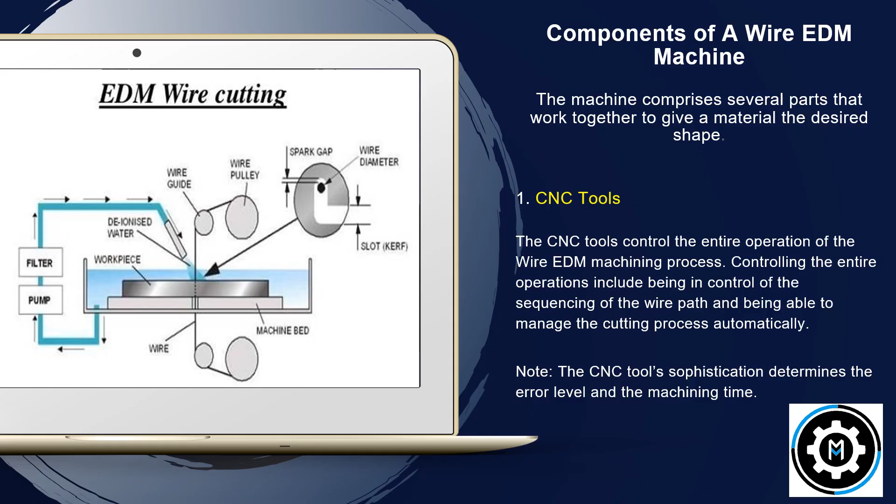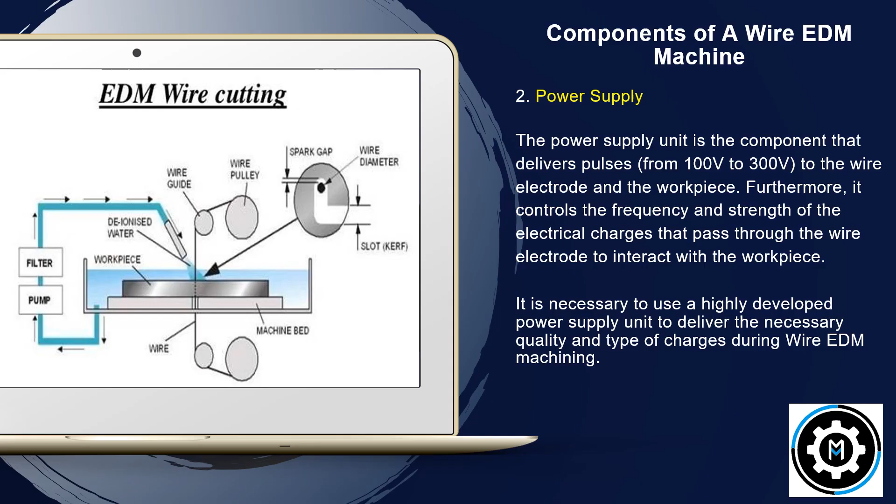2. Power supply. The power supply unit is the component that delivers pulses from 100 volts to 300 volts to the wire electrode and the workpiece. Furthermore, it controls the frequency and the strength of the electrical charges that pass through the wire electrode to interact with the workpiece. It is necessary to use a highly developed power supply unit to deliver the necessary quality and type of charges during wire EDM machining.

3. Wire. The wire serves as the electrode to create the electrical discharge. The shape and thickness of the workpiece directly influence the wire's diameter. Typically, one can use wires with diameters ranging from 0.05 to 0.25 millimeters.

The main types of wires used include brass wires. Brass is the most common EDM wire material because of its excellent conductive properties. It is an alloy of copper and zinc, and the higher the zinc content, the faster the wire cuts. However, there should be a balance because when the zinc content is over 40%, this decreases the corrosion rate of the brass wire.

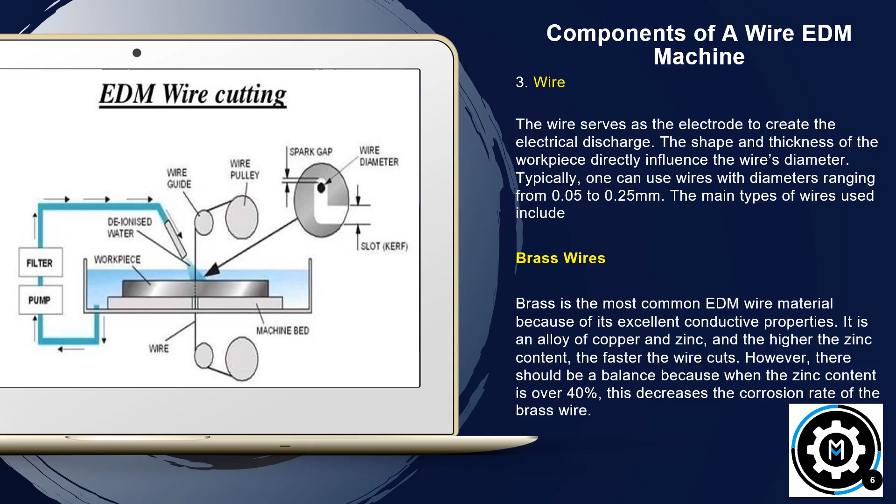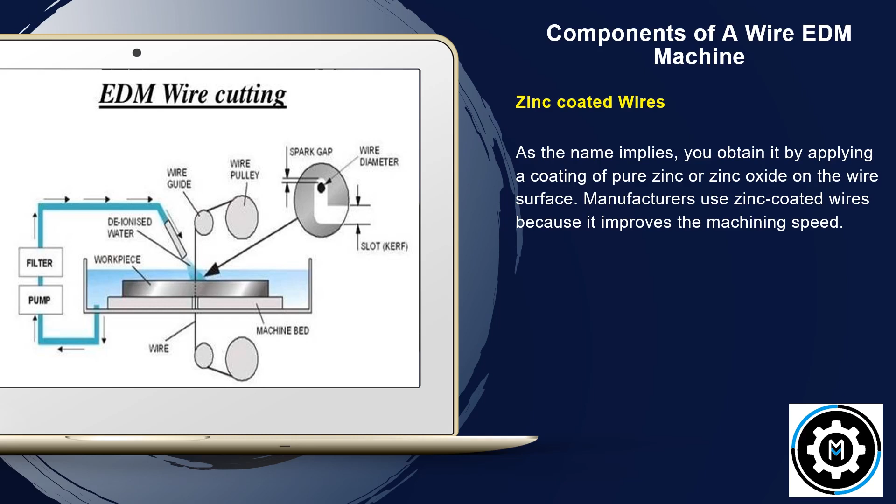Zinc-coated wires. As the name implies, you obtain it by applying a coating of pure zinc or zinc oxide on the wire surface. Manufacturers use zinc-coated wires because it improves the machining speed.

Diffusion annealed wires. The diffusion annealing process helps to create wires with higher zinc content, more than the 40% zinc. It involves coating wires with layers of pure zinc. These wires are ideal for mass production and can machine many materials.

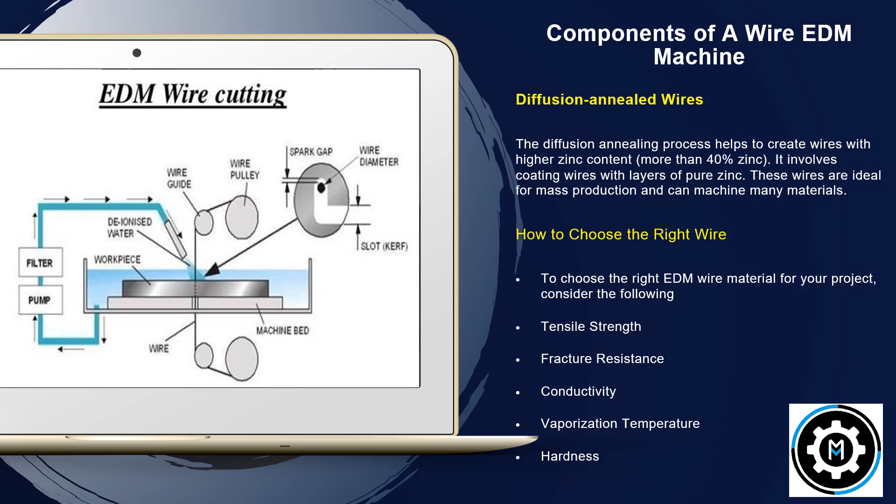How to choose the right wire. To choose the right EDM wire material for your project, consider the following: tensile strength, fracture resistance, conductivity, vaporization temperature, hardness.

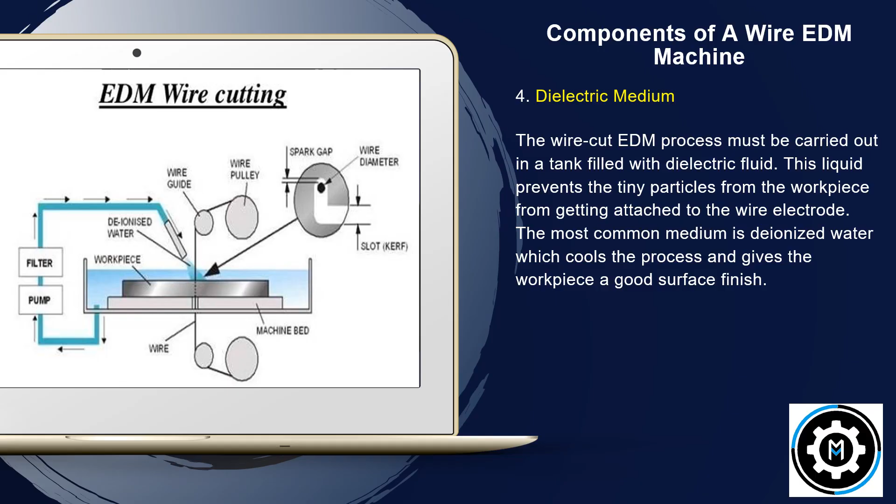4. Dielectric medium. The wire cut EDM process must be carried out in a tank filled with dielectric fluid. This liquid prevents the tiny particles from the workpiece from getting attached to the wire electrode. The most common medium is deionized water, which cools the process and gives the workpiece a good surface finish.

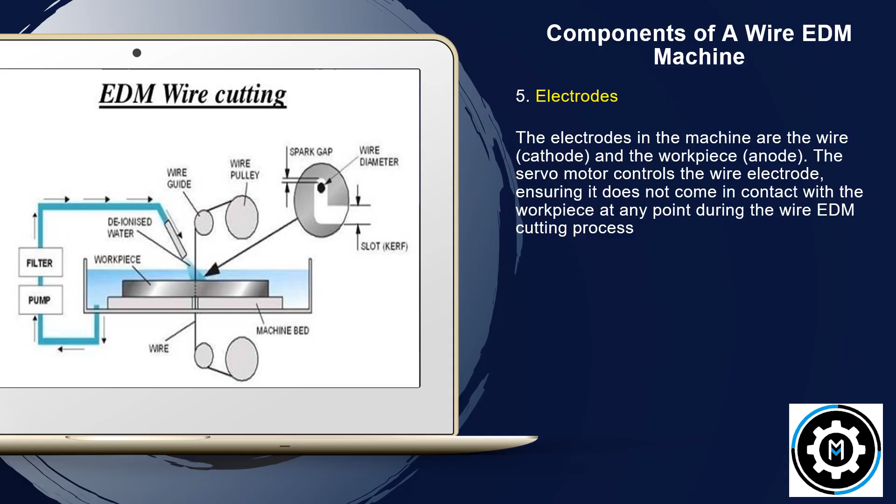5. Electrodes. The electrodes in the machine are the wire, cathode, and the workpiece, anode. The servo motor controls the wire electrode, ensuring it does not come in contact with the workpiece at any point during the wire EDM cutting process.

Materials a wire EDM machine can cut. Wire EDM machines can create complicated shapes and patterns on a workpiece. Additionally, they can machine most materials that can conduct electricity, even the tough and delicate.

Common shapes and materials you can cut with the machine include aluminum. Aluminum has excellent thermal and electrical conductivity properties. However, aluminum is naturally soft and can be challenging to cut with the process, as it may result in a gummy buildup after machining.

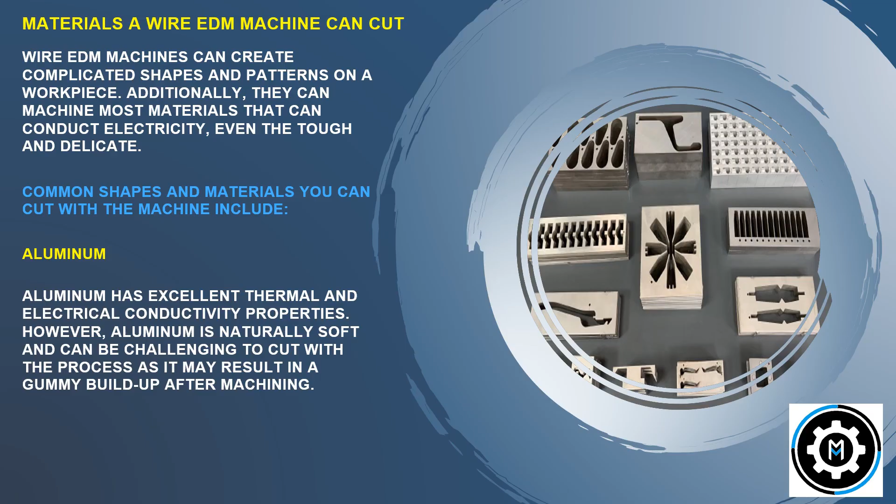Titanium wire EDM cutting is perfect for titanium, because the process can withstand the stickiness of this alloy and break up lengthy chips. However, you need deionized water as the dielectric medium to help control heat generation during machining.

Steel is a very strong metal. As a result, many manufacturers favor using a wire EDM machine over a CNC machine. However, the material generates a lot of heat, so one needs to take the necessary precautions.

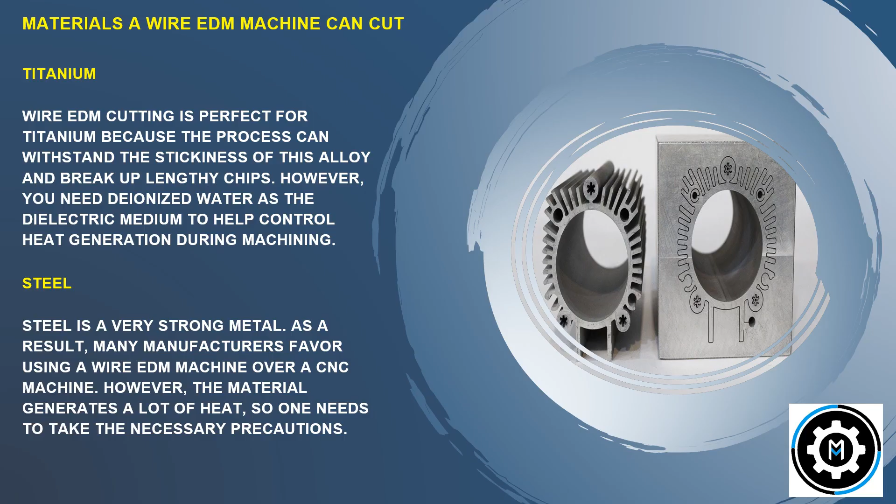Brass is easy to cut using the machine because it has high tensile strength. However, the cutting speed should be slow because it is a soft metal.

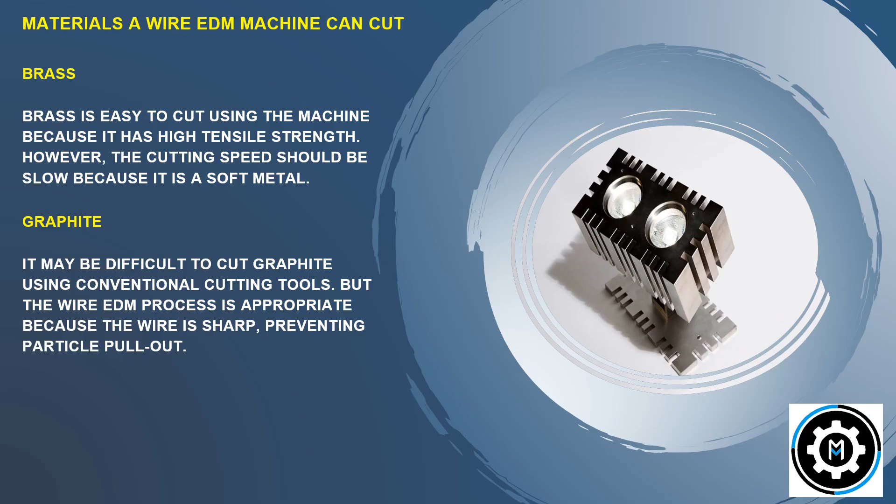Graphite may be difficult to cut using conventional cutting tools, but the wire EDM process is appropriate because the wire is sharp, preventing particle pullout.

Differences between EDM wire cutting and conventional EDM. The wire cut EDM process is an improvement on conventional EDM. Their mode of operation is similar, however, they have significant differences. Below are a few differences between both machining processes.

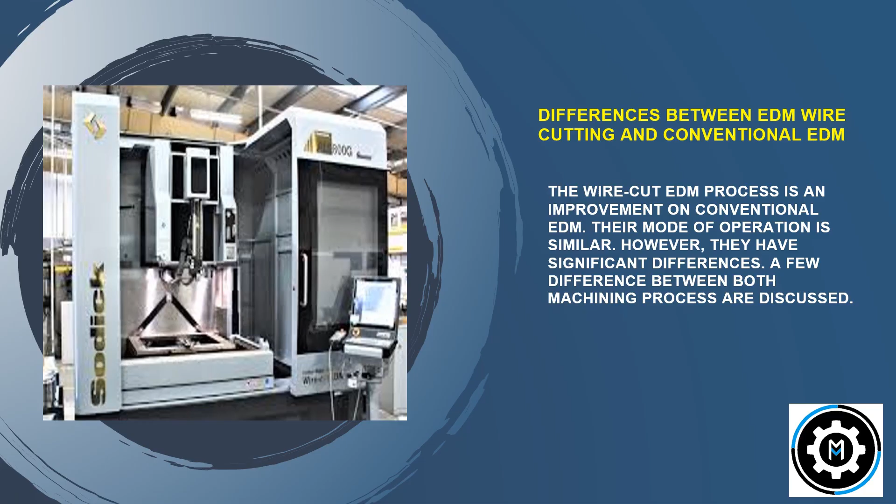As stated above, the electrode used in wire EDM cutting is a thin heated wire. In contrast, conventional EDM uses highly conductive metals like graphite or copper electrodes to produce electrical charges. The electrodes are in different shapes and sizes, which affects their smoothness. For example, a round electrode produces the smoothest surface, then a square, triangle, and diamond. When the electrode is inserted into the workpiece, it forms a mold, leaving a negative impression of its shape.

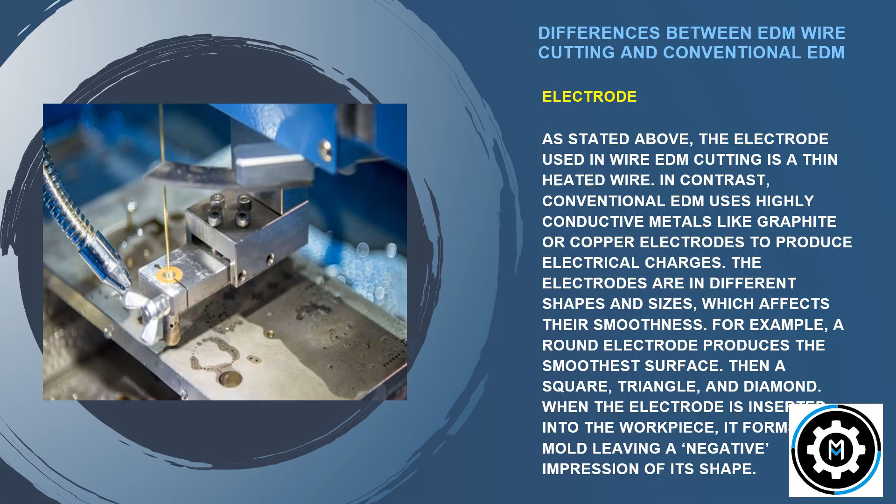Speed of machining: the electrodes of conventional EDM must come in different shapes. As a result, manufacturers must create and shape them before the machining process, and this takes time. In contrast, the wire EDM machine is ready to use as soon as the wire is in position, making it appropriate for applications that need to be completed quickly.

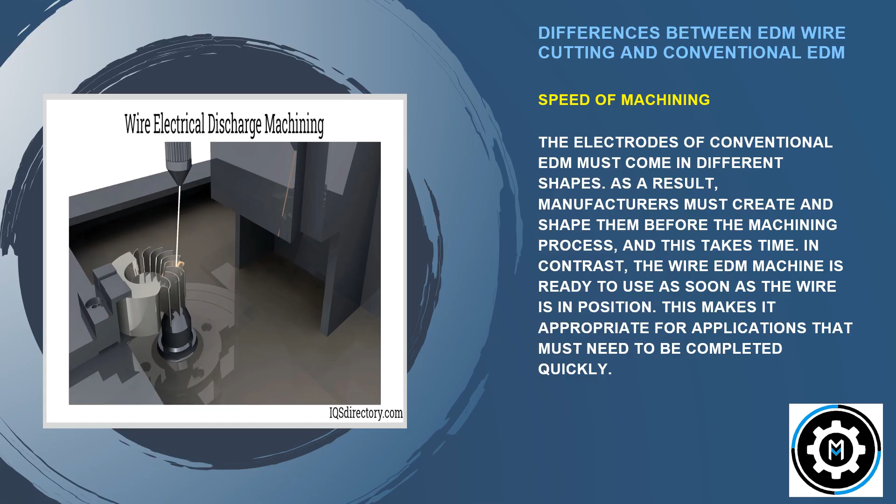Accuracy: wire EDM machining makes use of wire as the electrode. As a result, it has better accuracy than conventional EDM. For example, the wire electrode allows cutting at a thickness of about 0.004 inches. Due to their accuracy, they are better suited for machining parts with complex shapes and designs, unlike conventional EDM, which is more suitable for more rigid cuts.

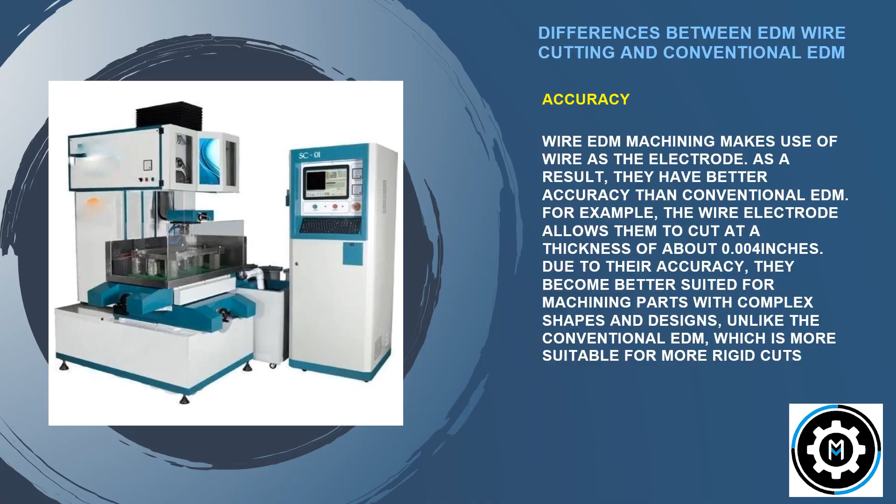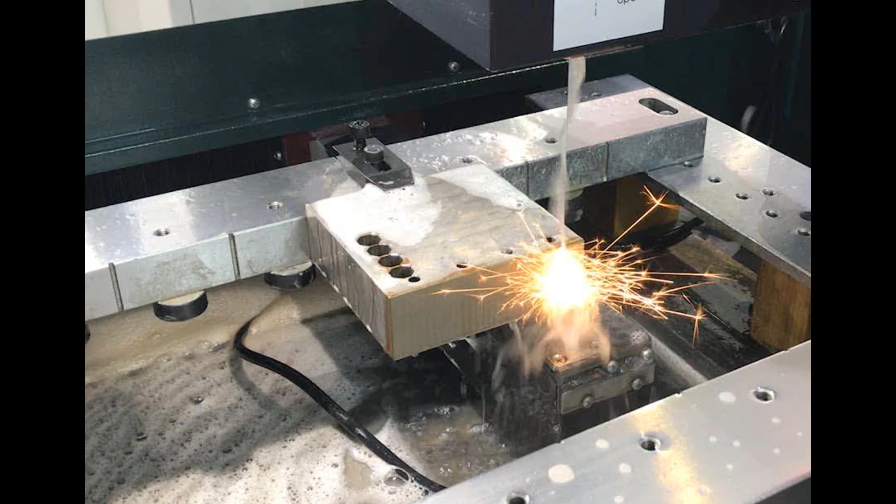Applications: wire EDM machining is versatile and can cut ferrous and non-ferrous metals, so many industries use it. Also, size and shape do not limit its use because it can machine both long parts and extremely small ones. However, conventional EDM can handle harder and thicker materials because the thickness of the wire electrode in a wire EDM machine affects its use.

Pros and cons of wire EDM machining. Pros of wire EDM: it makes precise and accurate cuts, eliminating the need for further processing and finishing of the workpiece. The process is suitable for creating complex designs and shapes that are otherwise challenging to produce using traditional CNC machining. It is applicable in machining small parts and cutting highly detailed items that would otherwise be too delicate for other machining options. Wire EDM machining is ideal for fragile materials that cannot withstand the stress of machining.

With just one stage of processing, the machine cuts materials leaving no burrs or distortion. The machining process cuts continuously without interruptions. Even if the wire breaks when cutting, the process continues immediately.

It is only compatible with materials that conduct electricity. An oxide layer may develop on the cut surface of some materials, such as aluminum. Therefore, this could necessitate additional finishing, which raises the cost. It has a high initial investment and maintenance cost.

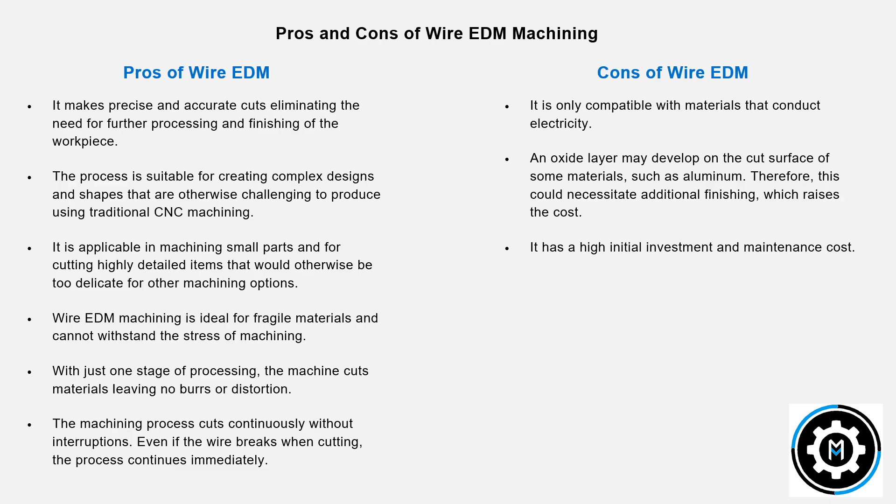Applications of wire electrical discharge machining. Automotive industry: parts in the automotive industry come in complex shapes and sizes and are mostly hard. As a result, the industry favors using wire EDM machines because the process does not rely on mechanical forces and the wire electrode does not need to be stronger than the workpiece. The process applies to making holes and cavities to customize automotive car parts like bumpers, dashboards, car doors, and many more.

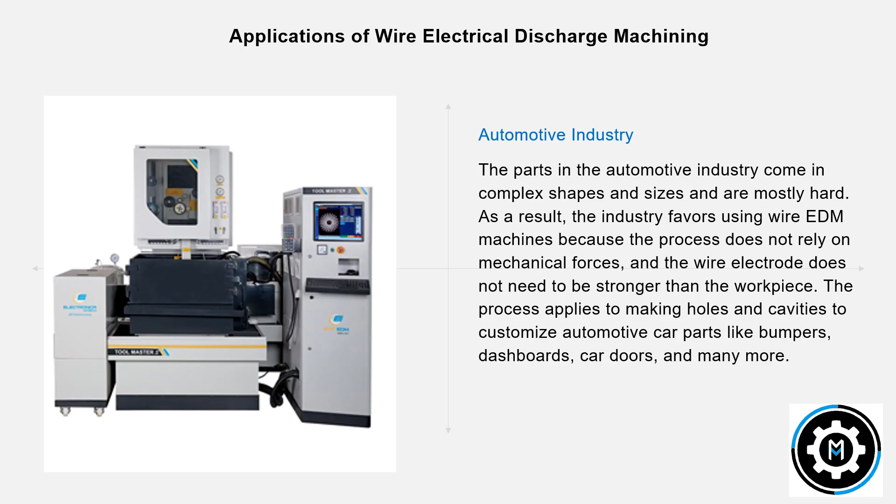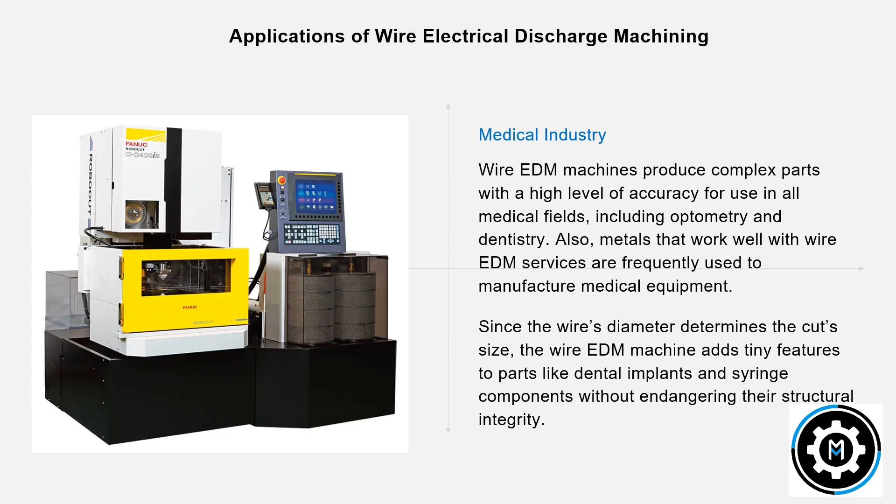Medical industry: wire EDM machines produce complex parts with a high level of accuracy for use in all medical fields, including optometry and dentistry. Also, metals that work well with wire EDM services are frequently used to manufacture medical equipment. Since the wire's diameter determines the cut size, the wire EDM machine adds tiny features to parts like dental implants and syringe components without endangering their structural integrity.

Aerospace industry: wire EDM cutting produces parts with tight tolerances and is the go-to machining process for aerospace part manufacturers. This process, alongside the water jet cutting process, is especially used for parts that cannot withstand the high temperature and stress associated with traditional cutting tools. Parts in the aerospace industry need to have an excellent surface finish and be precise and accurate. Manufacturers use the wire EDM process for years to make engines, turbine blades, landing gear parts, and many more.

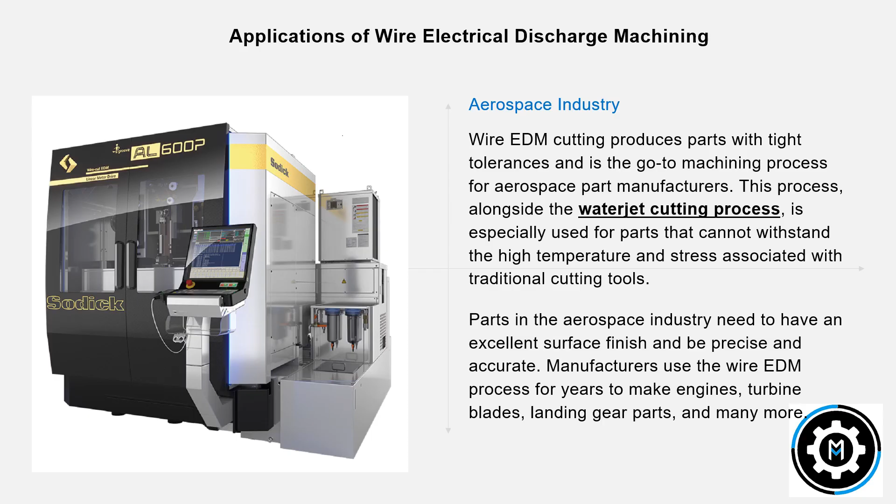Conclusion: Wire EDM is a versatile and precise machining process that can be used to create complex shapes and geometries. It is often used in the aerospace and medical industries, where parts need to meet tight tolerances. Wire EDM can also be used to create prototypes or one-off parts. In this article, we hope that you now have a better understanding of wire EDM.